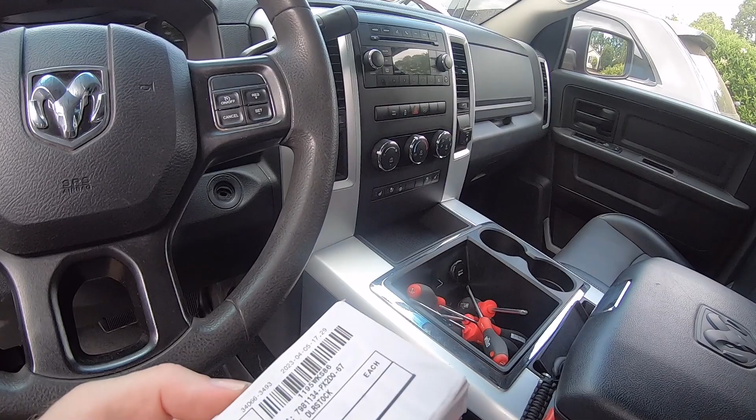So the fix online for it seems to be, what everyone is saying, is to replace this bank of switches based on the codes that were presenting themselves. I should be able to hook up a scan tool once we're done and show you what those 2 codes were, but they both dealt with resistance and circuit issues within this bank of switches.

That part number, at least in this particular make, model, and Ram's case, is right there. Let's see if I can get it to where it's not going to glare on you. There we go.

So what we need to do, and we've already taken the first step in our project truck here, is we've disconnected the battery and given the system a couple minutes to bleed down as a safety precaution, because we don't want to inadvertently set this airbag off. Part of this is we have to disassemble it enough and get the airbag out to get to the trim screws underneath, to be able to pull the trim ring off, and then finally get our bank of switches out.

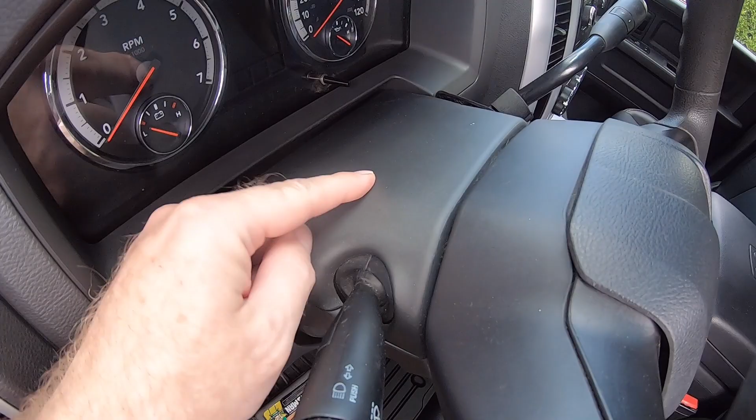We don't have to remove the entire steering wheel per the instructions. We just have to get this upper trim piece off so we can get behind here and hit some releases that release 3 airbag clips.

And kind of what they have you do is rotate the steering wheel around like this, and then also like this, moving it up to the top and up to the top again, and then finally rotating the steering wheel around so the bottom is now facing up, mainly because we're going to remove this piece of trim here, which will give us access into the rear of it.

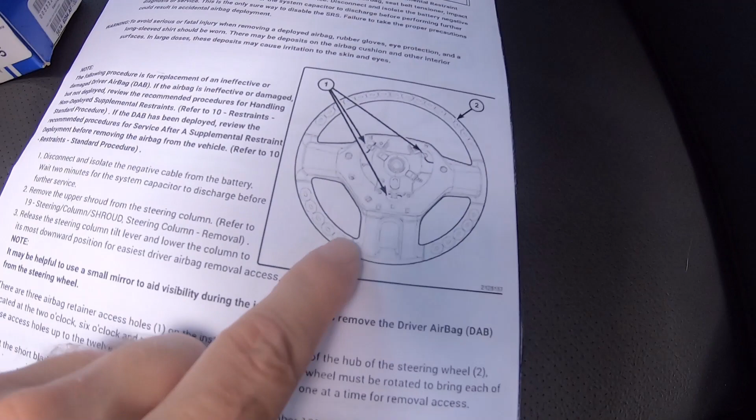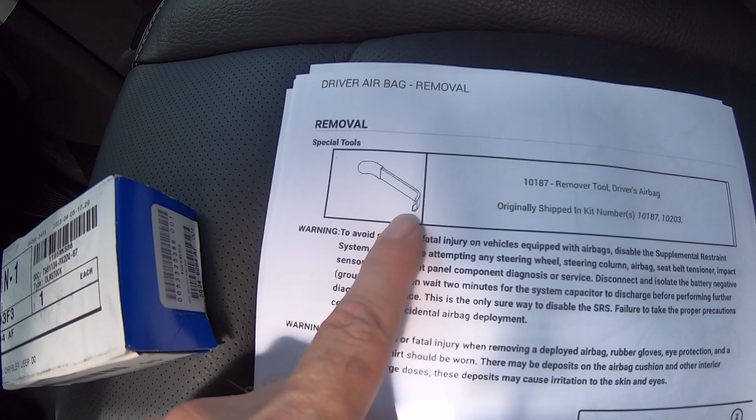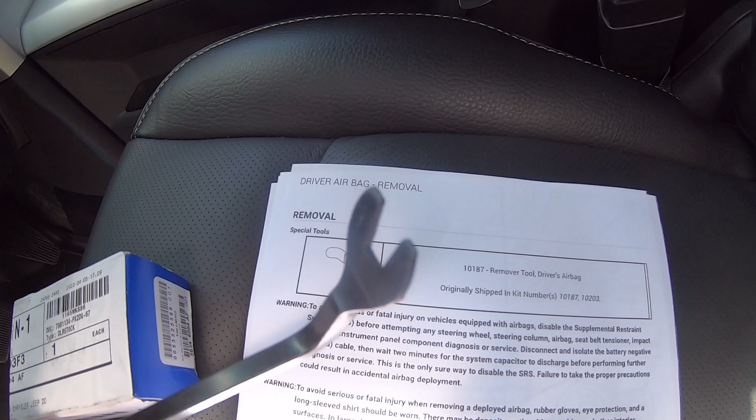And then we can pop these 3 clips. Now, they want you to use a specialty tool for doing that, and you can kind of see it just looks like a long piece of metal with a little hook on the end. I don't have that actual tool. What I'm going to try to use is this trim removal tool, which is used to help pull the Christmas tree clips out of trim panels.

As you can see, it looks pretty close to the little angled tool with a little foot on it that they say you should be using. So we're going to give this a shot and see if we can at least get those clips to bend back.

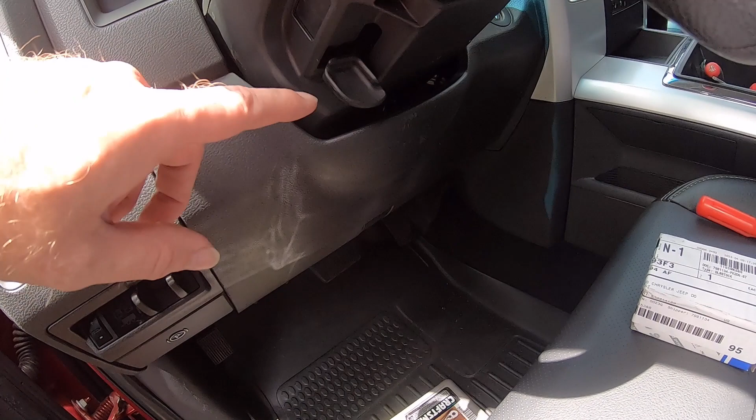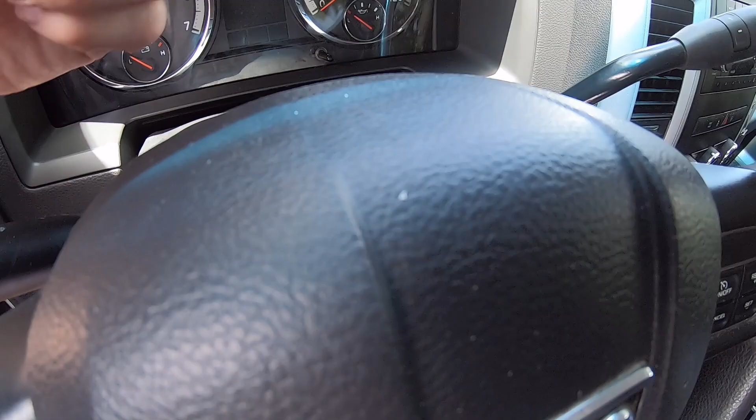If that doesn't work, we'll see what else we can find. The first thing I'm going to do is take a Torx bit per their instructions, through this channel here, and we're just going to take this top cover off, then get on to trying to get behind here and see if we can get these clips undone. Let me get this top cover off and I'll bring you back. One moment.

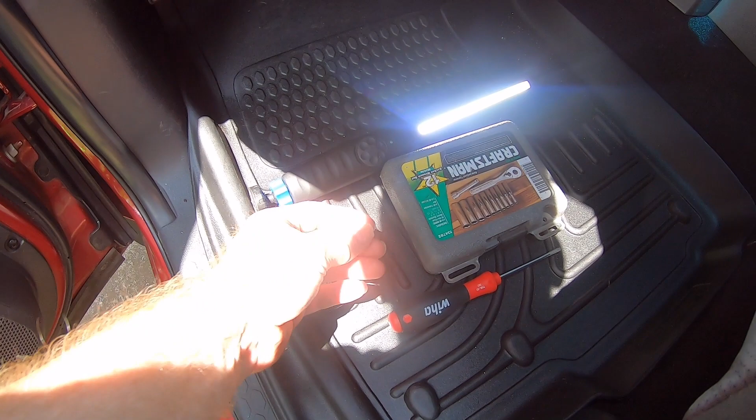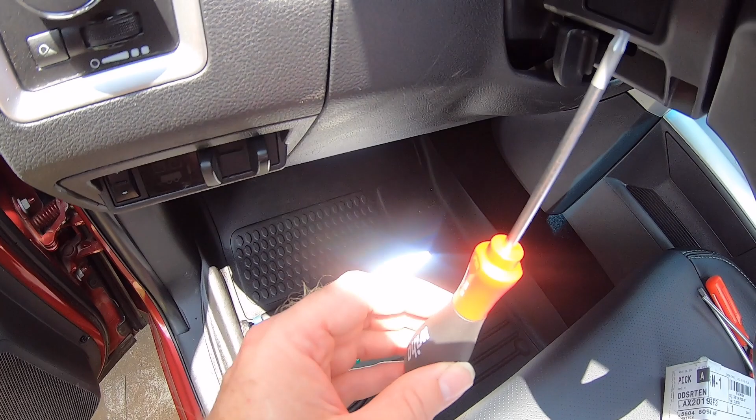And welcome back. So we took the steering wheel adjuster and just pushed the steering wheel down as low as it would go to help get the back cover off. It's two Torx bits, just like the instructions say. You can see they're fairly long, coarse threaded screws. It's a Torx, a T15. You'll need a fairly long bit to get up in here to reach it, and you can see what I'm using - just a Torx driver. I don't want to call it a Torx screwdriver, but that was long enough to get up in there and get those loosened up.

But again, steering wheel angled down as low as we can get it just to help get this back cover off. As you can see here, you just have to finagle the cover a little bit to get it to let go. And there we go. There's not too much holding that cover on once you've got those screws off and everything tilted forward.

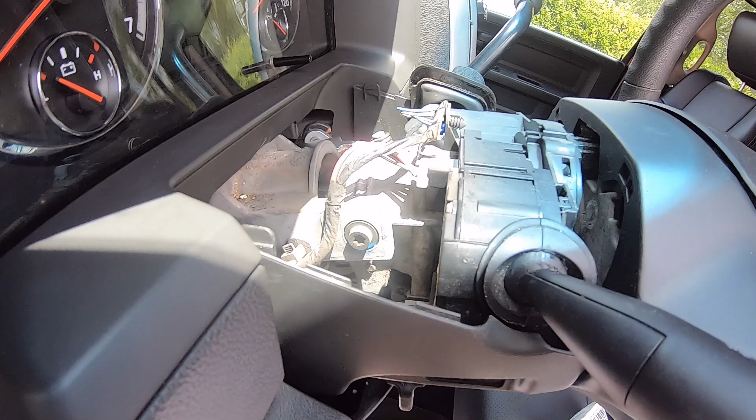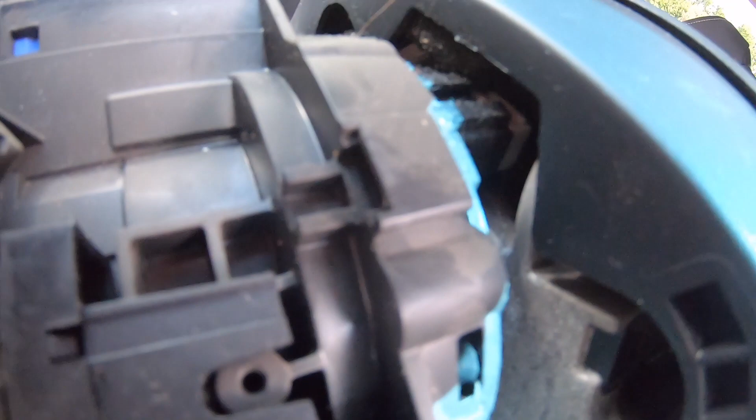So apparently what we're looking for is behind here, and there should be three of them - up in the corners here, here, and then one down on the bottom center. The first two, the question is can we reach in there to get those out? I think what we're looking for is, I'm going to have to finagle my way in there. I may have to look in through the front windshield in order to see it. You may actually be able to see it better than I can. I'm trying to look through the viewfinder of the camera.

I think what we're looking for is through here, and it's going to look like a loop or a hook of metal, almost like a big loop of a metal staple, that we can push the loop out of the way to get it off the clip. Let me pause so I can see where you're at and see if I can see this thing. I may not be able to get this on camera, but I'll see what I can do. One moment.

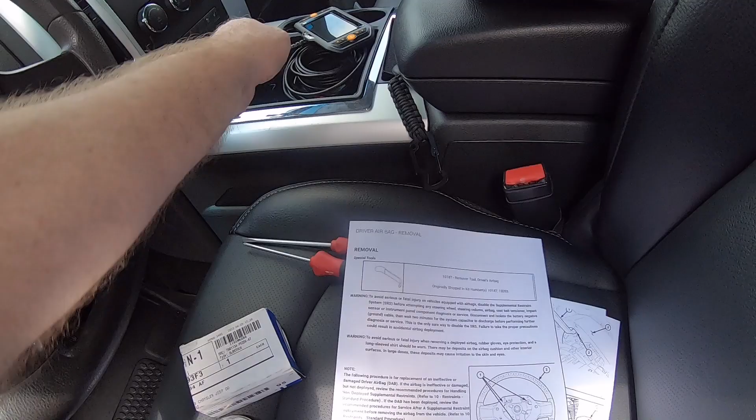And welcome back. So we got our first clip off, but I'm going to show you what I'm doing here. Our first thought of using this trim removal tool - this actually would have worked quite well, but it's just a little bit too long to get back in there because of the distance between the back of the steering wheel and the gauge cluster.

What I'm finding works pretty well is a small flat tip screwdriver about this long. And because of the space you have in here, it's kind of hard to see what you're doing. So per the manual, the easiest thing to do - I'm going to try to get it lined up and get you into the shot here. Hopefully you can see that.

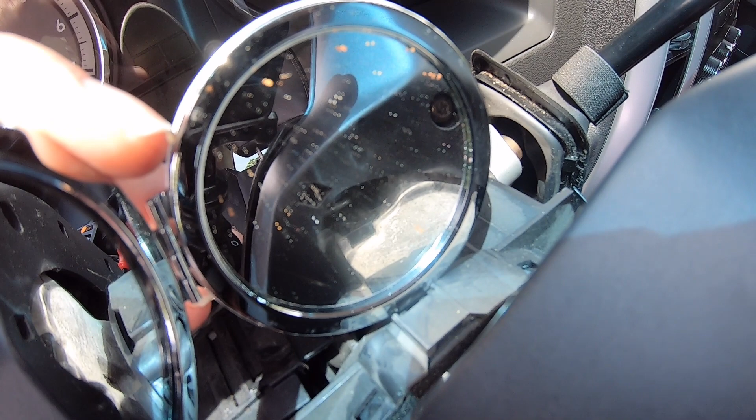You'll see in that mirror a little wire loop around kind of a black peg. Hopefully you can see a little bit better there. And then what you can do is use the mirror with a small flat blade screwdriver, get up underneath the wire loop, and pry it upwards until it clears the black tab it's looped around.

You can give a little bit of a pull onto that corner of the airbag, and that should get that retaining clip to pop off. I'm going to do the same thing here. As you can see, we're rotating the steering wheel to get the particular corner we're working on up towards the top center, so it's easier to get in there and work with. I'm going to see if I can get the two remaining retaining clips off, and I'll bring you back. Definitely having a mirror with this makes it a lot easier to do.

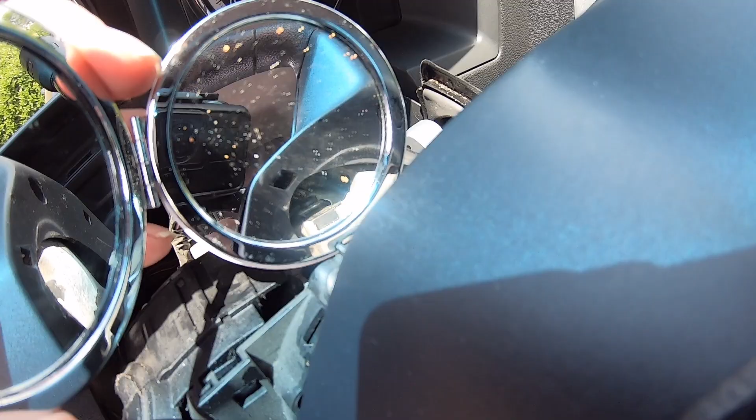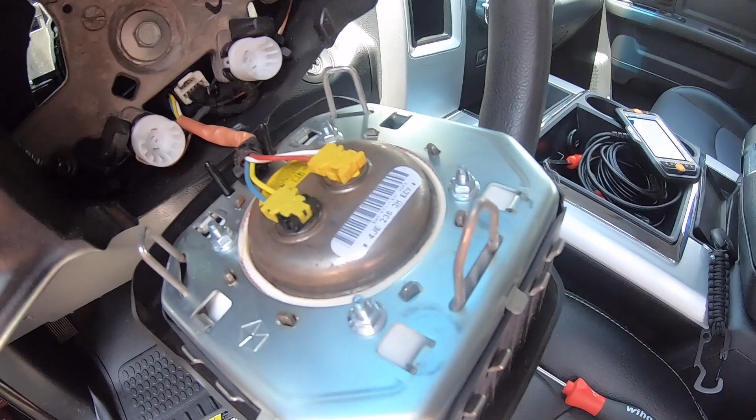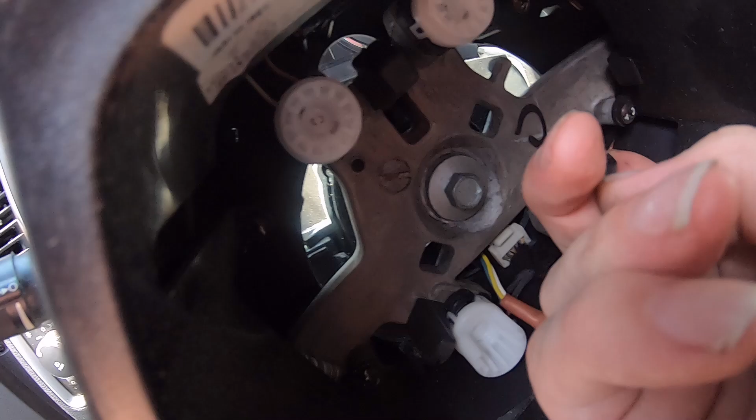And welcome back. So you can see we've got our three tabs that were depressed, and what you're doing when you're picking up on that tab is you're taking the loops here that are attached to the airbag and pulling them forward like this. You're kind of bending them forward to get them to release off of these tabs you see in here, and there's three of them. Just remember, that's this bottom center one, that's the bottom of the airbag.

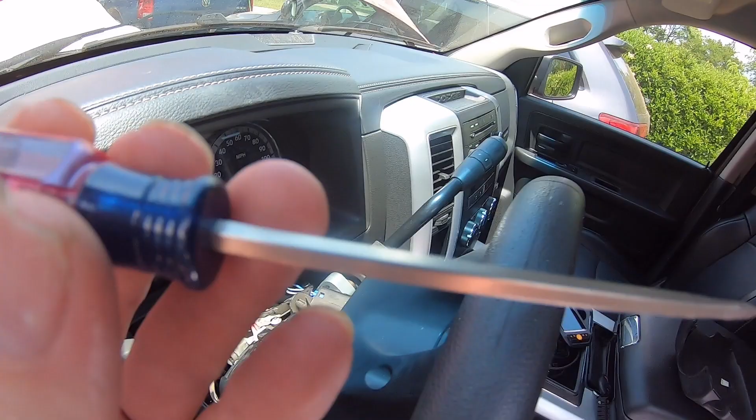The best tool I found is I had to go back and get a slightly different flat tip screwdriver. It has a pretty narrow point, but it's just long enough to get in there, get underneath that hook, but also not too long where you don't have some decent swing with it without hitting the cluster. So that's about the size of it there. About 4, maybe 4 or 5 inch small flat blade, probably about double the size of a pocket flat blade screwdriver. But it seems to work pretty good.

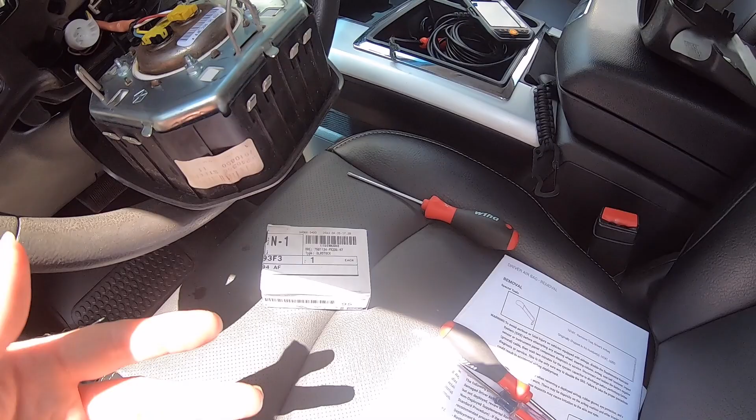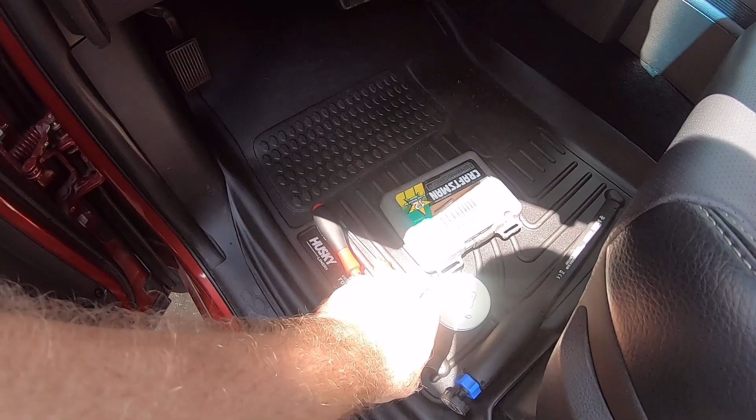But if you've got access to the actual tool to bend that back, or if your parts store has the tool you can rent to do that, I would probably suggest getting the tool. Like I said, had to fight with it a little bit, and it did help to have a mirror back there to kind of help see what was going on.

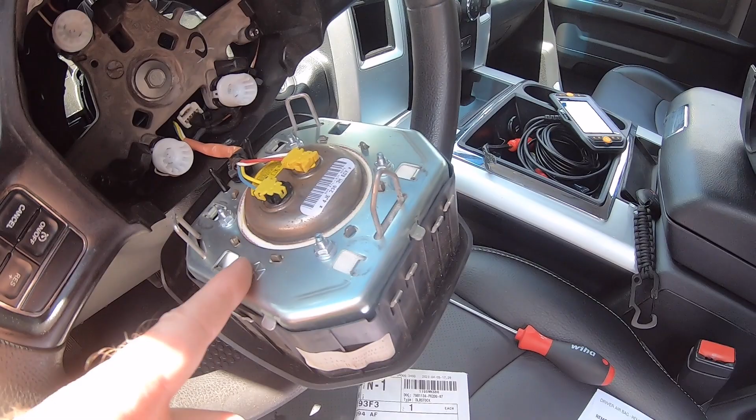What I'm going to do now is squeeze these tabs, get the airbag disconnected, and just be careful with it. I believe these are color coded as far as the orientation, but we're going to remember that the blue and yellow connector goes here with the airbag facing this way. This is obviously the down position of the airbag, so that connector is going to face us and the other connector is going to face away.

So I'm going to get these disconnected, and then we're going to rotate the steering wheel and get it back into center. Then we're going to see about removing some Phillips screws in here to get the front trim piece off of the wheel so we can dismount our switches. Let me go ahead and take care of this airbag and I'll bring you back.

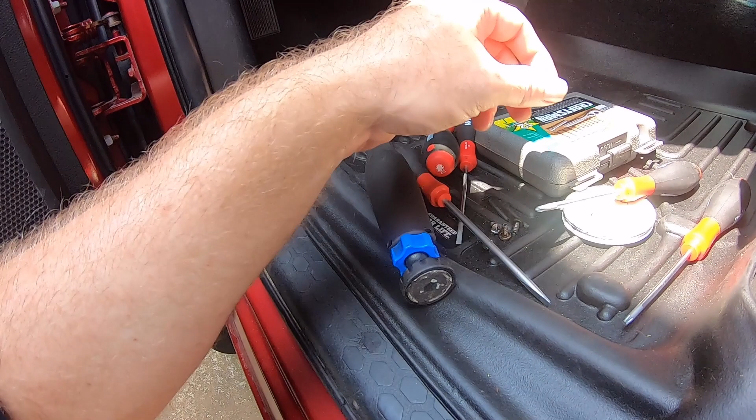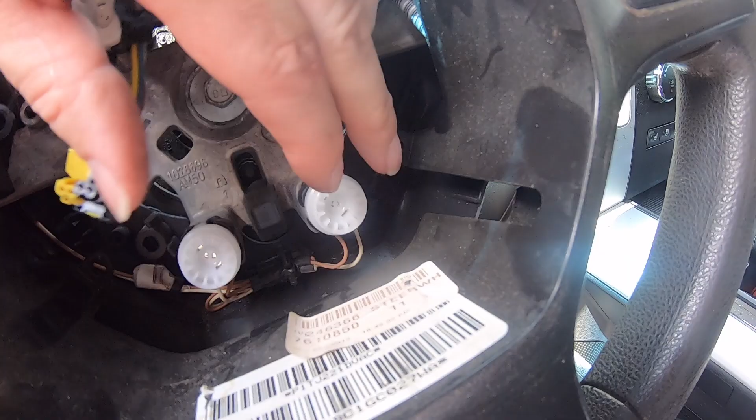And welcome back. So it's a mixture of screws that hold this trim piece on. As you can see, the trim piece also holds our switches. There's 4 screws inside here that are underneath the airbag. The top are Torx screws, which I believe were - that is a - T15, nope, they're T20s. So you've got a couple of T20 Torx bits at the top corners, and Phillips screws on the bottom, on the back of the steering wheel, right here on the bottom, where you see these little indents.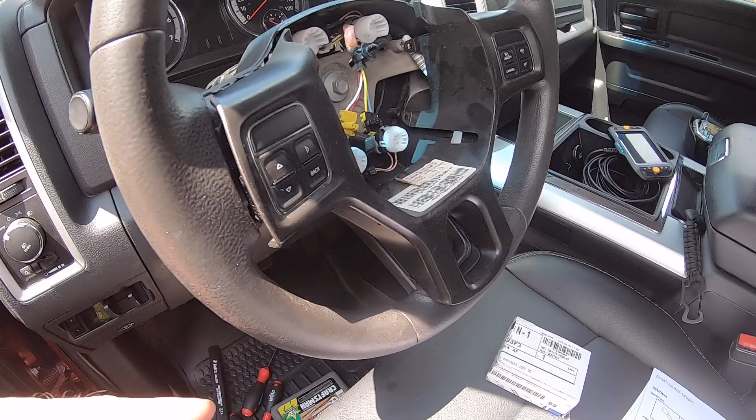You have another set of Phillips screws in there. You may need a stubby Phillips to get those out for clearance, or you can just rock the steering wheel from left to right a little bit to get in there with a standard Phillips to back those out. Once you have them backed out, you can see this piece is now loose.

We've got a little bit of free play here to work with, but not much, because you've got a part of the wiring harness that comes this way off the center connector, part of it goes that way. Now it looks like we should be able to potentially disconnect this connector here in the center, but I don't really want to do that because I don't want to completely remove the steering wheel.

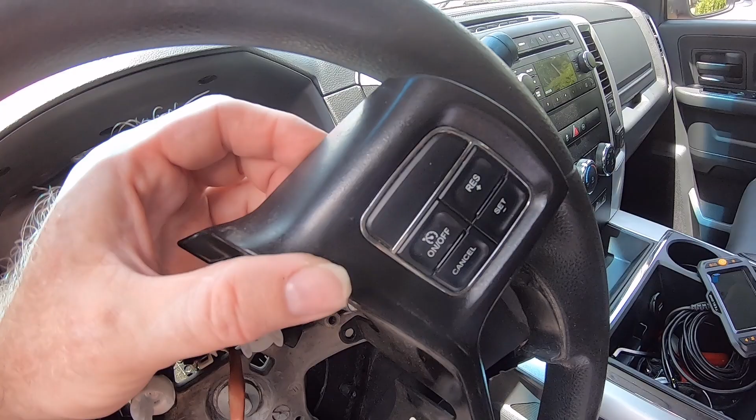We may have enough slack in our cabling. There we go, get this loose. Yeah, we may have enough slack in the cabling that we could just rotate it like this and gain access to the switch.

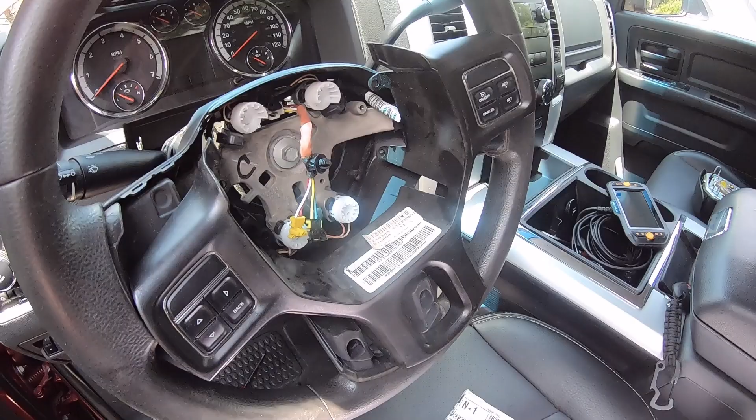You're going to go upside down for a second, sorry, but you can see our switch there. We should just be able to remove the 2 Phillips screws you see there and the connector, get that replaced, and go ahead and do our reassembly. That's what I'm going to do, because like I said, I don't want to disassemble it any further than I already have.

Whew, it's going to be a hot one out here today, let me tell you.

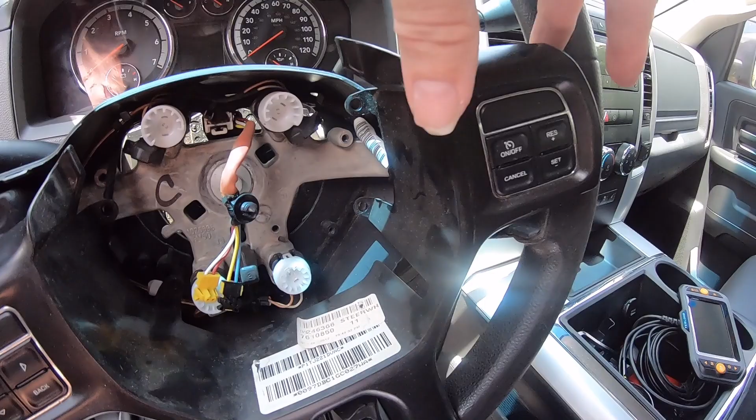Let me do that. So I'm going to again just tilt it up to get access through the steering wheel. We're going to remove it, replace it, and I'll bring you back when we do the reassembly. One moment.

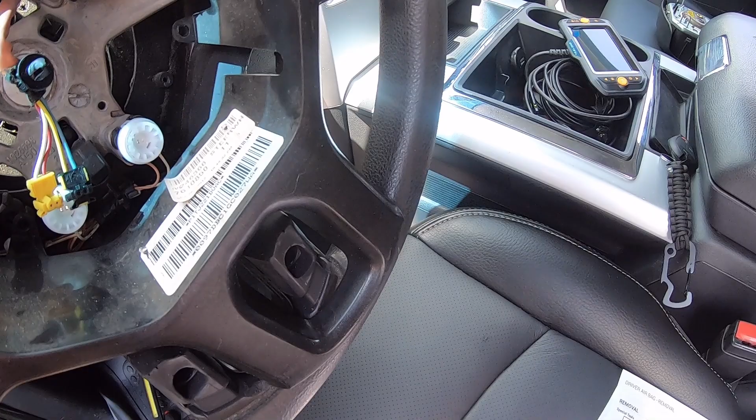Welcome back. So we went ahead and got our new module in. This is our old module here. It's held in by those 3 screws you saw earlier, let you know they are Torx bits, 3 T10 Torx screws that go in the back of that. Now this is just threading into this plastic piece of trim here, so no need to break out Thor's full strength hammer when you're tightening those down, if you know what I mean.

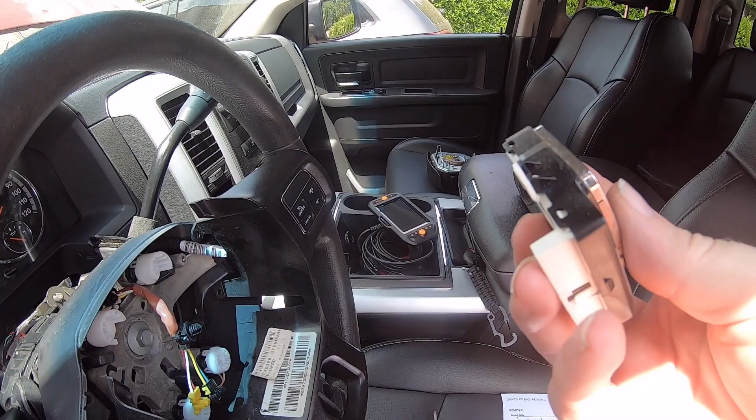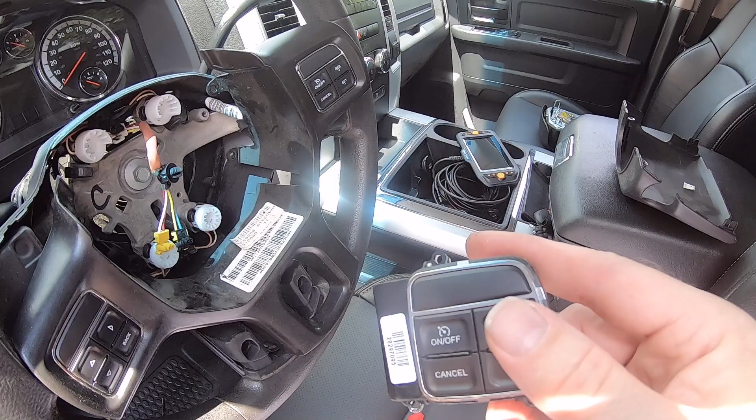As for the reason of failure, I think this is why we went after the bank of switches and not the wiring, because remember earlier when we were pressing these and I ran a scan tool in the truck, it came up with a resistance fault on these. So it tells me it sees the buttons, and it also tells us that it knew we were trying to engage cruise control, but it refused because it didn't like what it was seeing for an output on this, mainly a resistance check. Now the reason why I think this failed is that this is sticky.

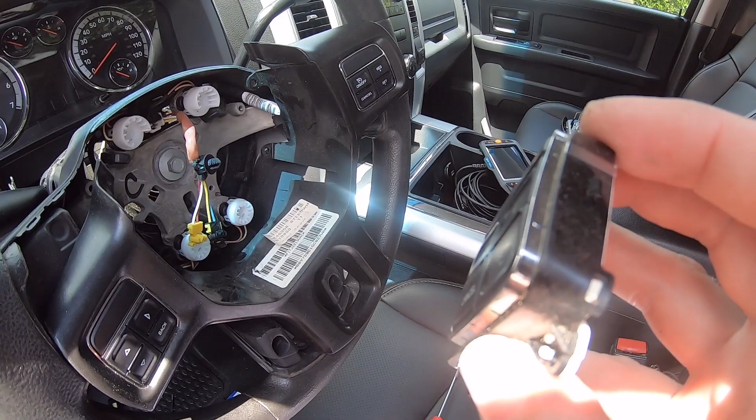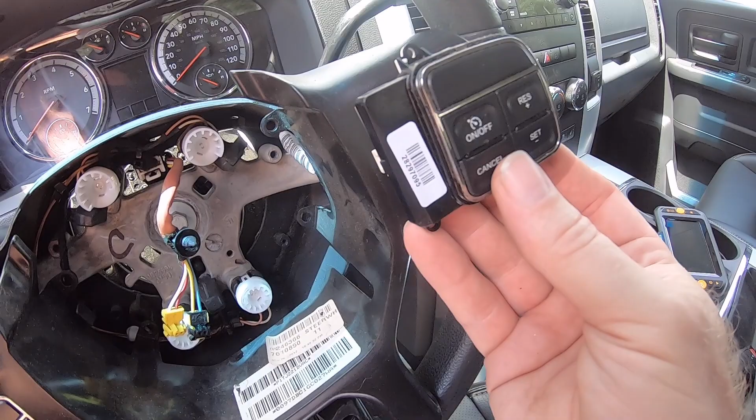It's like sugary drink type sticky all along the edge here. Now this is my theory, but seeing that this is on the right hand side next to where the cup holders would normally be in any standard Ram, and knowing the sheer amount of other sugary snacks we cleared out of this truck when we were redoing the interior, I'm going to fathom a guess that chances are the previous owner was also into sugary drinks, whether that be soda, sweet tea, whatever, probably holding it in right hand while driving, and probably got some content splashed on these buttons, maybe once, maybe twice, who knows. But I'd be willing to bet you, just because it's sticky, like sugar type sticky, that's probably what did this switch in. Again, just a theory.

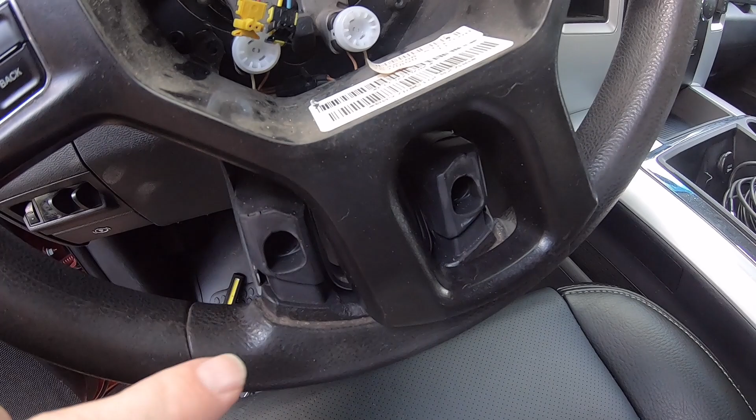So we're going to go ahead and work on getting this all buttoned back up and reassembled. Remember, there's the 2 screws you see down here at the bottom, which are also flat tip - I'm sorry, not flat tip, but Phillips. 2 bottom ones here that are Phillips, and 2 Torx on top, and then I'll get this trim ring back in. So we're going to work on getting this reassembled, and I'll bring you back. One moment.

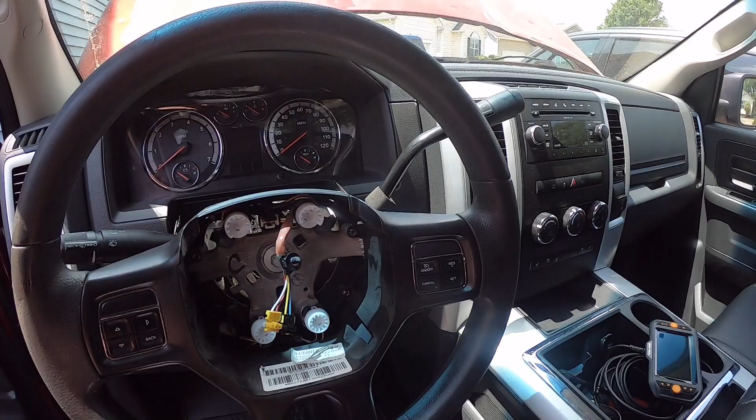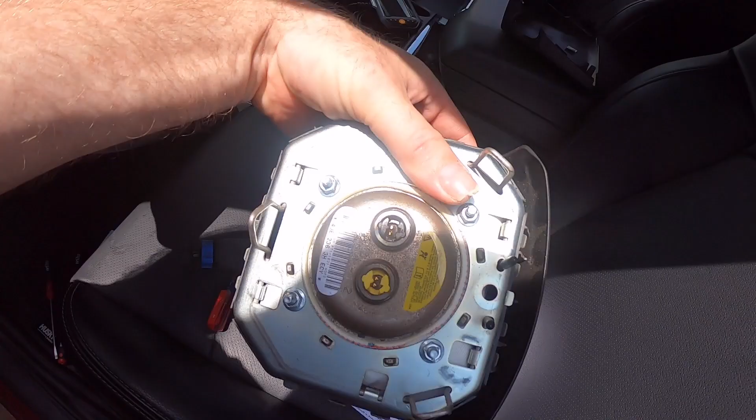Welcome back. So we got our Torx screws here, and the 2 bottom screws, and the bottom pad of our trim panel, we've got that reinstalled. We already put the airbag back in. Just remember, you've got a Christmas tree clip, it goes in the bottom center of the bag right there. And remember that these are color coded, the black to black connector, yellow to yellow connector.

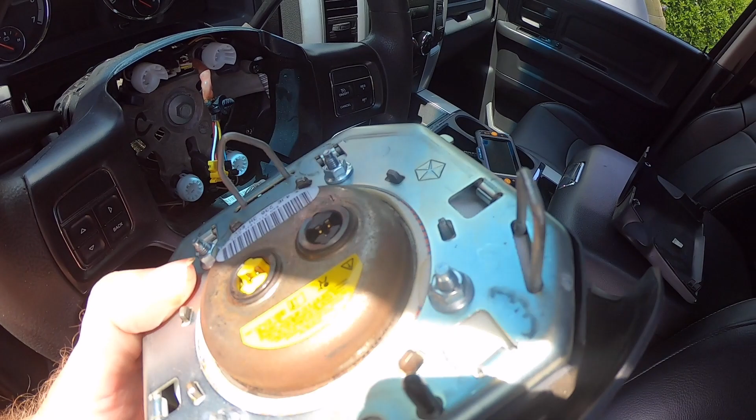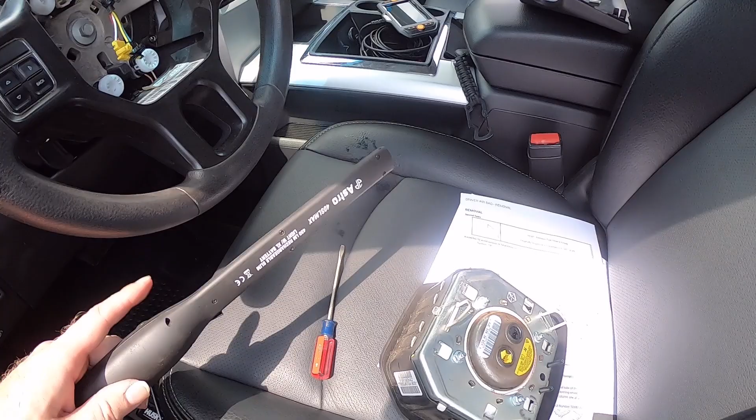And then what should happen is once we press this in place, those 3 loops, so there's 3 eyelets holding, I guess you could call them springs in a sense, should snap back in place and grab hold of all 3 of the mounting locations. Let me get you some light. So you'll have a mounting location right here at the bottom of the flashlight, you see right there, and then of course 1 up here in the corner and 1 over here in the corner. They should just snap back in place. So I'm going to work on getting this airbag back in. I'll bring you back. One moment.

And welcome back. I got you zoomed in on the scan tool, keys in ignition. We're just going to do a rescan here.

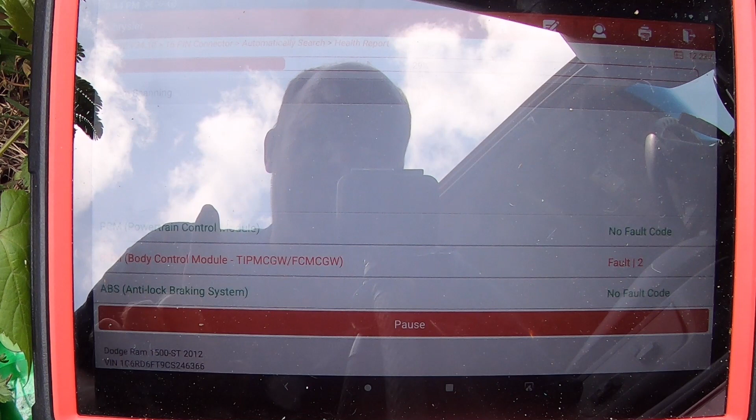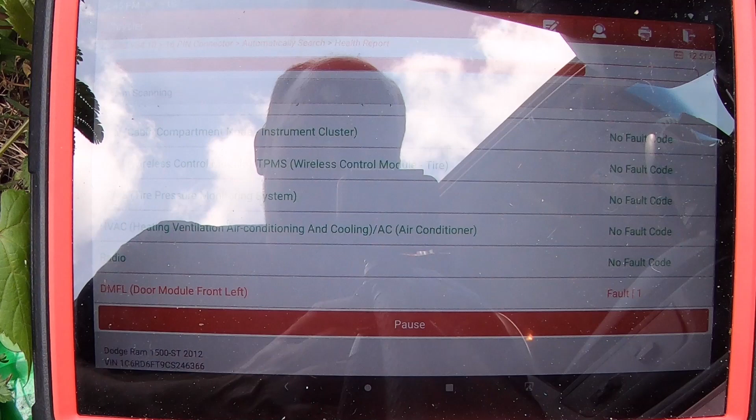I don't think we're going to see the codes that I wanted to show you because we did pull the battery, and I don't think those codes were in a set fashion. I believe they were pending, and because of that it's more than likely wiped them out, unfortunately. But just to reiterate, the reason why we went after that bank of switches was because it was showing a resistance issue within that bank of switches when we want to engage or turn on the cruise control system.

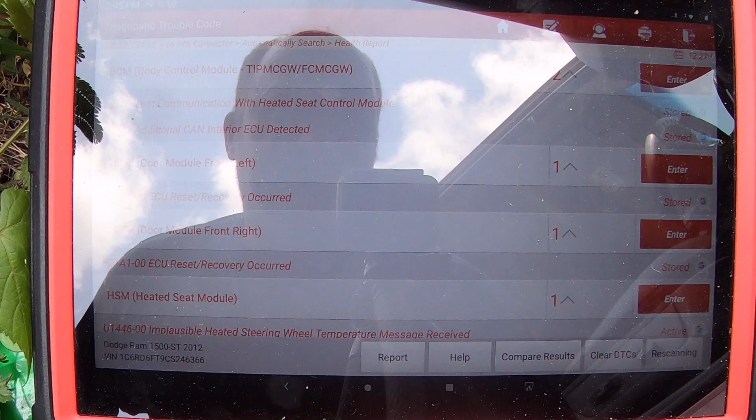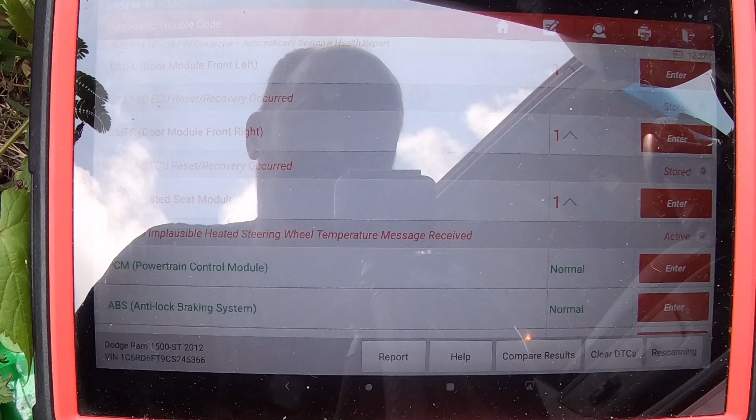You can see here everything is just in a stored status, one active status, which if you've watched the videos previously on this channel, you know that we're always going to have this heated steering wheel error because the heated seat module we took out of our donor RAM that we grafted into this one, we only used it for the heated seats. We didn't move over the steering wheel, so that module is still looking for the steering wheel to be present, which it'll never see, but that's the reason why we had the fault. So no harm, no foul there.

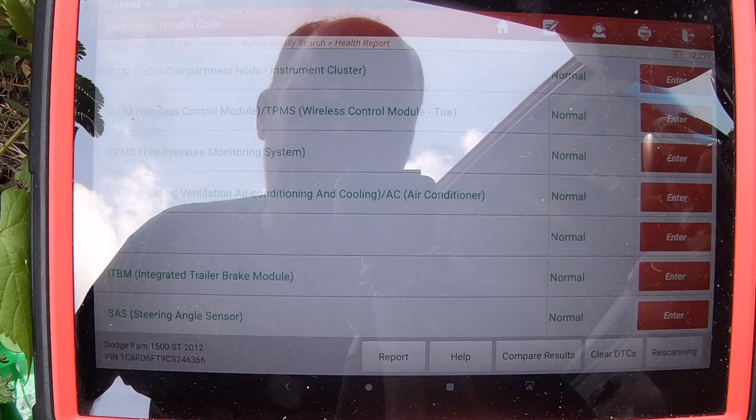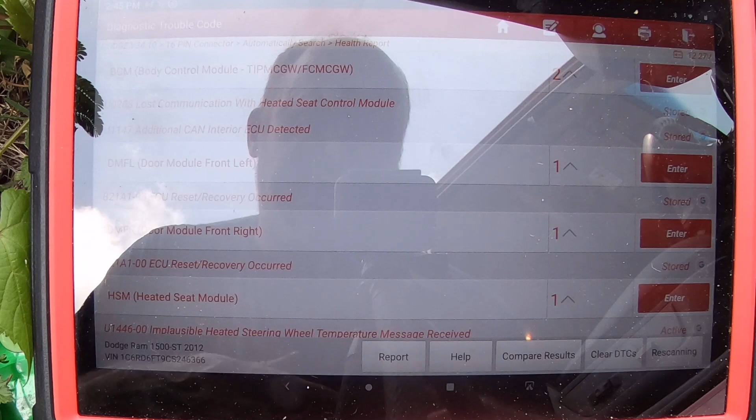Everything else you can see is in a normal status, again, because the battery was pulled, and unfortunately those codes showing that resistance error within that bank of switches weren't in a set state before I pulled the battery, so my fault on that one.

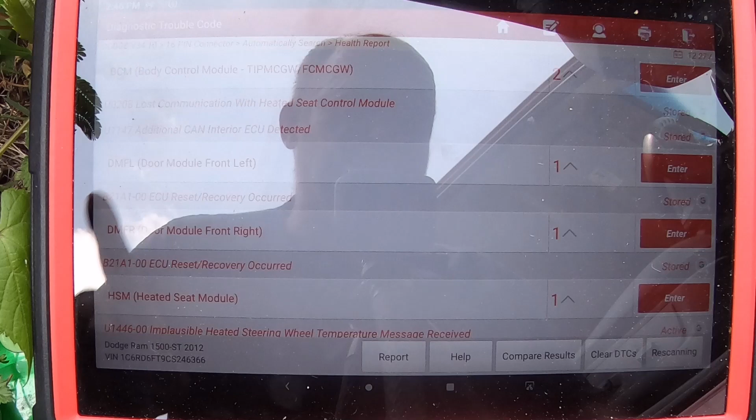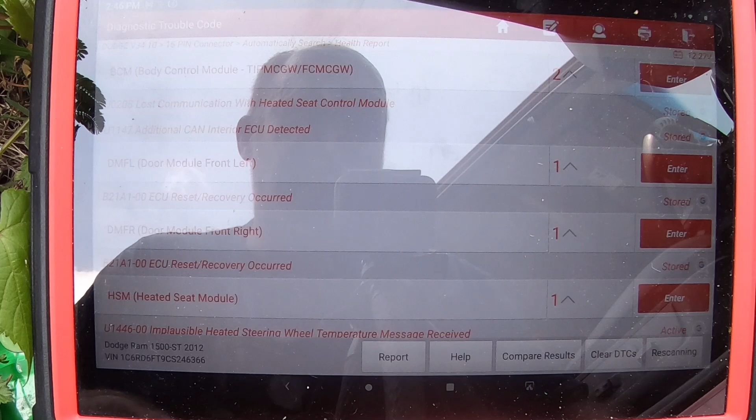So what I'm going to do is, and the reason why you may see this additional CAN interior ECU detected, remember we took it in for recall service work, and that was for the transmission shift interlock. When they did that, part of the recall was they upgraded all the software in any truck modules that needed it, so they basically flashed the entire truck back to its base configuration. And since we added the heated seats, the quad headlights, the remote start, we did all that via AlfaOBD, and it didn't come from the factory that way.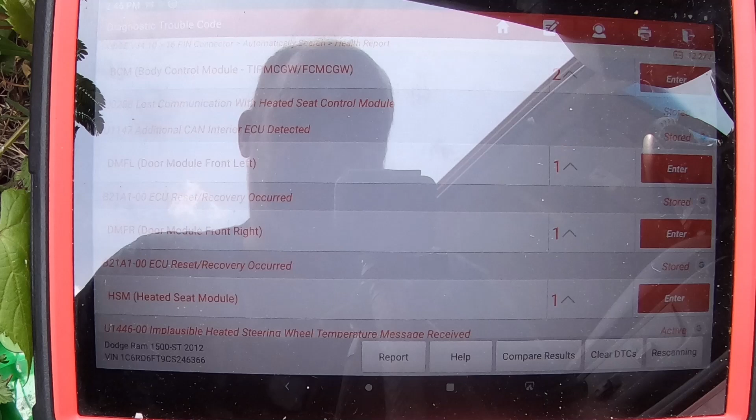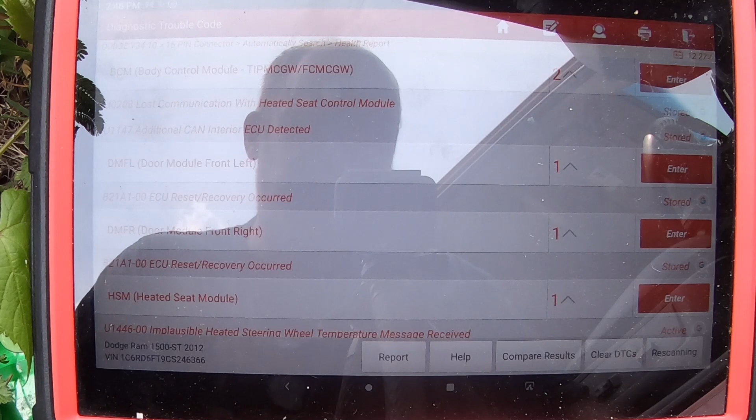It turned those settings off. So when we did get the truck back from having service work done and its annual inspection done, we did have to go into that AlfaOBD software and turn those options back on, which again, it had no issue doing, even with the updates that they did to the truck.

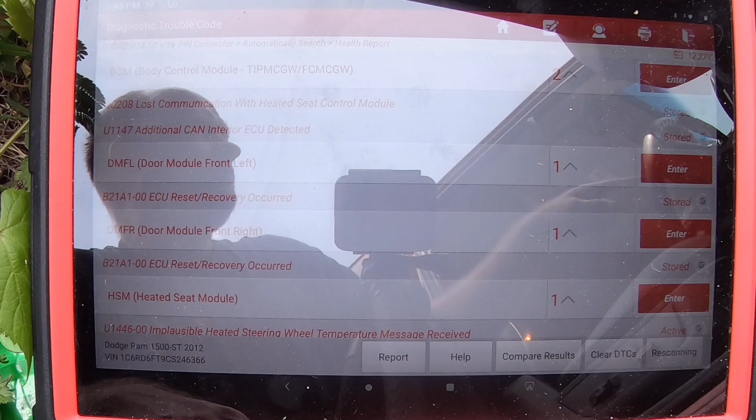But with that being said, what I'm going to do next is pause you. And I'm going to get you zoomed in on the dash, and like I said, we won't be able to set the cruise control obviously because the truck's not in motion, but we should be able to turn the system on and see the indicator on the dash, which is what we couldn't do before. So one moment.

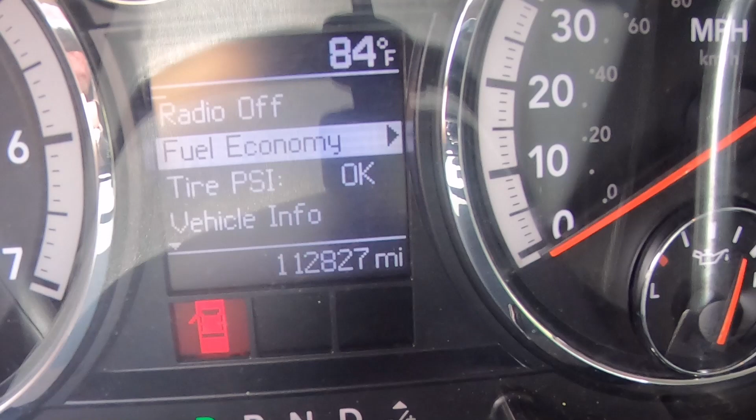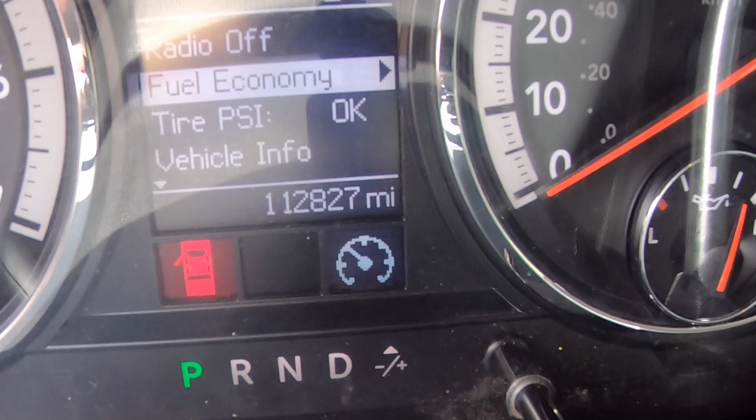And welcome back. So I'm going to get you as close to the dash as I can here. You're going to have a little bit of a glare, but what I'm going to do, I'm going to hit the on-off button to turn on the cruise system, and we should see an indicator light in the lower right there of the display, and there we go. Beautiful, we do. So that little gauge, that little speedometer icon you saw that just came on, I'm going to turn the system off again, on again, and off again. When you see that icon show up, that means the cruise control system has been turned on at that point, which that's already an improvement versus what we were seeing before, where we would hit this button and we would get nothing at all. So let me turn that off, and I'm going to shut the truck off.

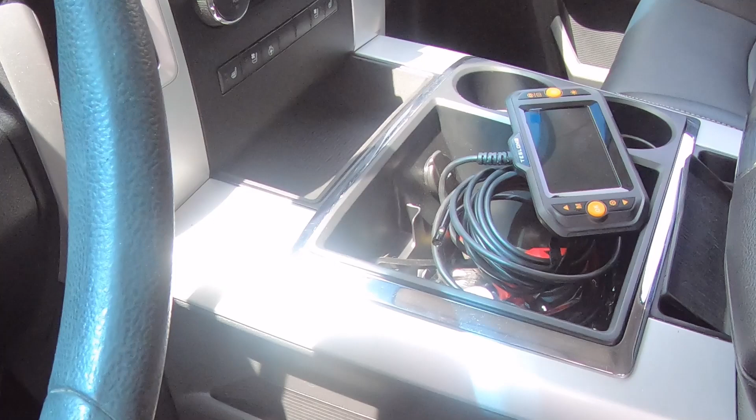And what I'm going to do, I'm going to stop you so I can zoom you out, and I'll bring you right back. One moment.

Okay, that's better. Got you zoomed out a little bit so you get a bigger picture here. So to recap what we did when we took it for a little drive to get the service work, recall work, and inspection done, we noticed we could hit the on button for our cruise control and wouldn't get the expected result on the dash. It wasn't turning the system on.

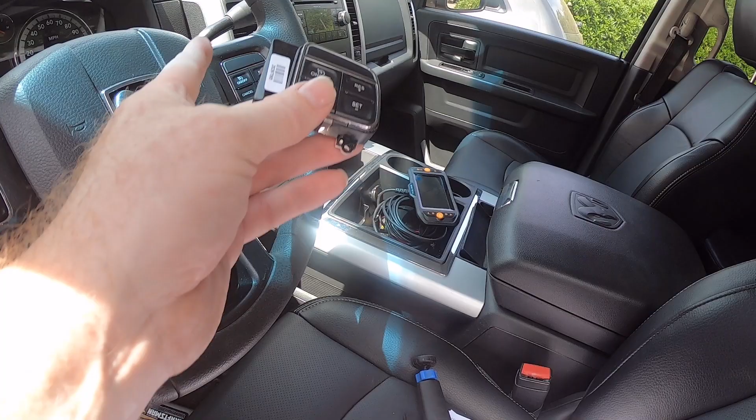When I code scanned it, I got two codes pointing directly to a resistance fault within this bank of switches. The reason we went after this based on those codes alone is because it registered a fault and knew we were trying to hit the button, which told me the wiring between here and the internal truck was okay, was basically good to go. So I bit the bullet, knowing the wiring was good, and bought a new bank of switches, which did fix our problem.

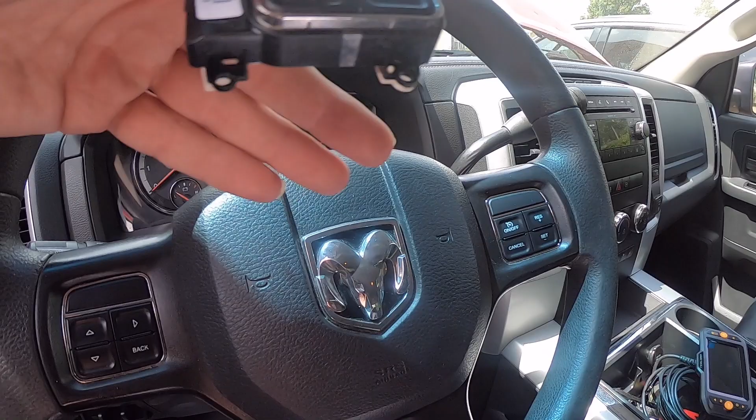Now, one thing we don't have on this particular model, and as I said earlier, you may have a type where the cruise control option comes out on a stick on the lower right, because you've got a different steering wheel and different buttons. I think you can get an alternate version with U-Connect buttons at the top, if I remember correctly. If that's the case, when we do the engine rebuild, we may tear the steering wheel apart again and try for that, considering we took the radio out of our parts RAM that has the U-Connect buttons on it. The wiring within the steering wheel may support the slightly different module. I'll have to see if one's available.

When we get around to doing the engine work and have the truck down for maintenance, we may switch it out and see if it works. But it's not too difficult of a job to do. There are Torx fasteners and Phillips fasteners on this, as you saw. The worst part was getting the catches for the airbag on the corners and the one down here at the bottom to release.

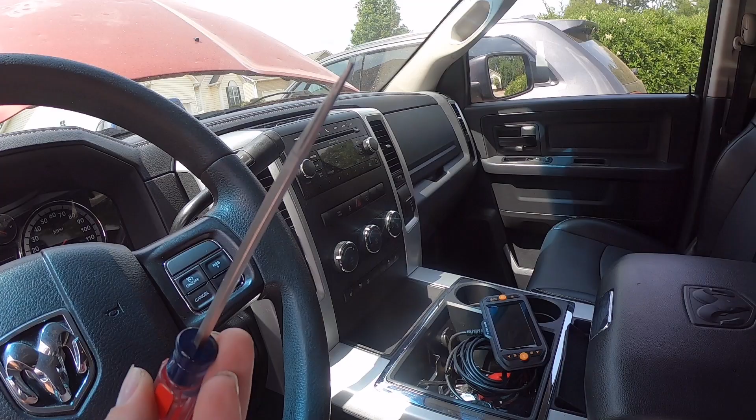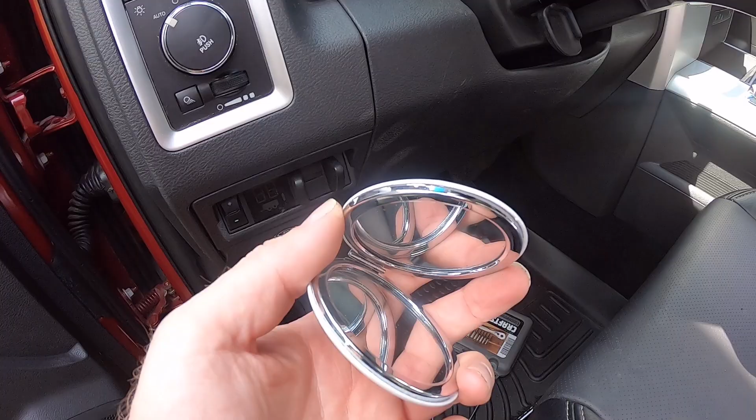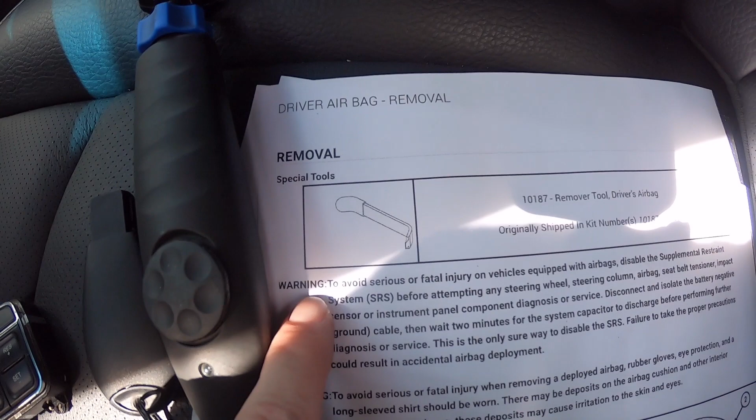We found out that using a screwdriver, as you can see there, one about double the length of a normal pocket flat blade screwdriver, was enough to get in there and pry up on those hooks to release them. Having a mirror, like this little kitty mirror, helped out quite a bit once this top piece was removed, so we could see what we were fishing for. If you've got this tool, or if your automotive store can rent it to you, I'd suggest getting it.

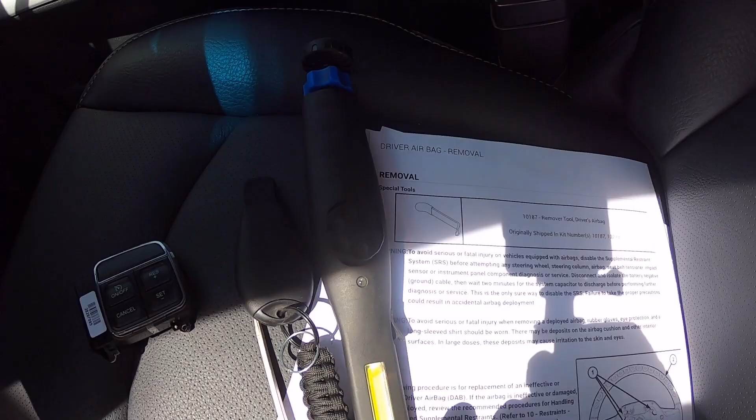It would more than likely make this job a lot easier, but it is doable with a standard flat tip. Just be careful, because you're dealing with airbag wires - make sure you disconnect the battery. In this particular Ram model, the manual states to give it about 2 minutes for the system to discharge before handling it. Also, even though you've discharged it, it's still an airbag, so be extremely careful with the electrical connections. You don't want to damage those, or you'll start getting an airbag fault. I'm not saying this to deter you, just be mindful of these things.

Like I said, it's overall a pretty straightforward job to do. The worst of it was just getting the airbag out. After that, it's pretty straightforward to get this trim piece off and swap out that bank of switches.

So I like to save this for the end of the video: as you know, we did pass our state inspection. So we now have a year, a little more, since the inspection isn't due until the end of June. So we have about a year and a month or so before we have to do it again. We've got plenty of time to get the rest of our parts in, pull the motor, do the work we need to do, and start to get things reassembled.

But for now, I will definitely do a follow-up video on this - we are just waiting for parts to arrive at this point. The cam hasn't arrived yet, but that was going to be a custom grind per our tuner, so it may be a little while yet before Comp Cams gets to that order and produces that part for us. But we have gotten some items in, like lifters, hardened push rods, valve springs, seats, and retainers.

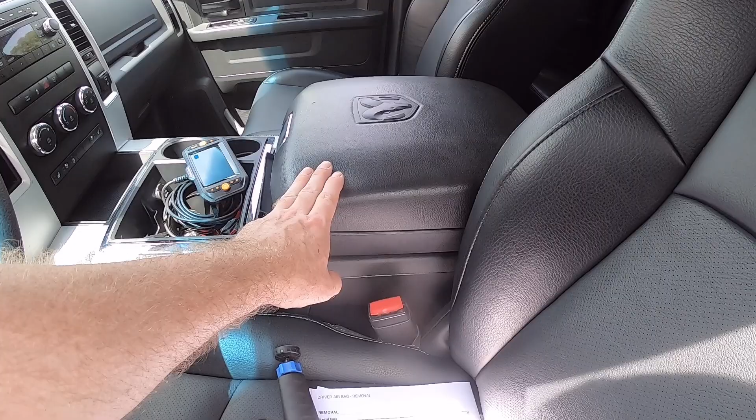You saw that we took the seats, the console, and the dash and basically dropped them right in. We didn't have to make bolt holes or come up with brackets that weren't there. As long as we had the brackets that came with the console, the cab already had provisions to bolt that stuff down without having to create it. It's actually kind of cool.

Going on a bit of a tangent here, the next thing coming up will be getting the engine parts in and then prepping this to get the engine pulled and start the build-up on performance. We're going to go with what a lot of tuners would typically call a stage 2.5 cam, but it's going to be a custom ground cam, ground for power as well as the ability to add a supercharger at a later date. So we'll build the engine up, get it tuned without the supercharger, see how that looks, and then add the supercharger at some point after the fact.

We've also got rear end work that we want to do to the differential. Basically, to take a long story short and stop the rambling here, we've got a lot more content coming up on this truck.

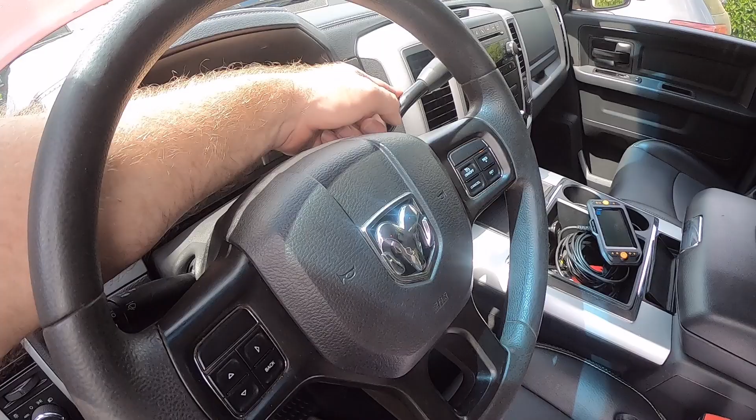Now, one thing that we did have done, and I haven't told you this till now. When they were doing the service work on this, getting that safety recall fixed for the shift interlock, as well as getting the inspection done, we went ahead and had them take care of the bed a little bit. I'll show you what I'm talking about.

There you go, get a look at that. If you've seen the previous videos, you know that should look like a night and day difference. Now you've got some pollen in there, I apologize, a little bit dirty, but since their guy was there that does their spray-in bed liners, we went ahead and had them spray in a nice bed liner to help protect the bed. If you remember, we were just starting to get some rust spots in the bed of this, and in order to keep it from getting any worse, we went ahead and had them spray it. Night and day difference.

After we had it sprayed and brought it back to the house, we did change out the plastic end caps on both sides of the rails. These are actually Dorman end caps, believe it or not. I couldn't get the Mopar or any other ones, but even though they're Dorman parts, they fit just fine.

Now this is an OEM one. We went ahead and replaced this cap as well across the tailgate. This is an OEM one. These pins come out, this is the only piece that has pins. You pull these pins out, they're just standard plastic push pins, and then they're clips, and you could just pop it up. On this one, we were able to just pop it up, get all the clips off, and clip the new one in place.